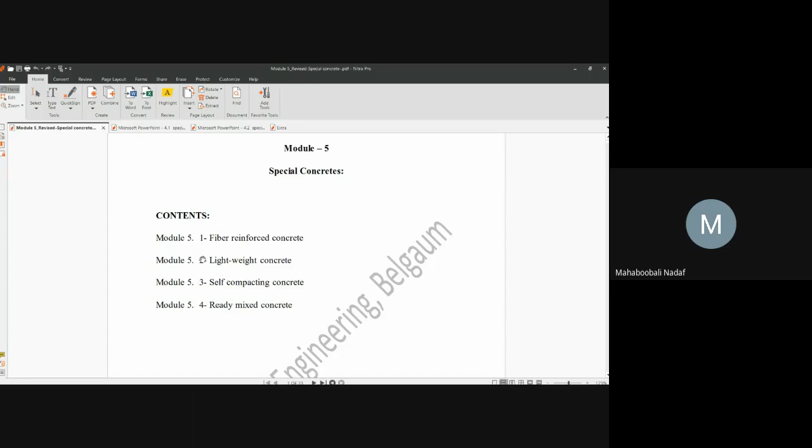What is your expectation from this module? Amrit, Bharta, respond, reply - that is very important in the online class. Okay, whether my voice is clear or not, tell me. Yes sir, very clear. How much clear - 90%, 50%, 80%? 99%, okay very good. And what about the screen?

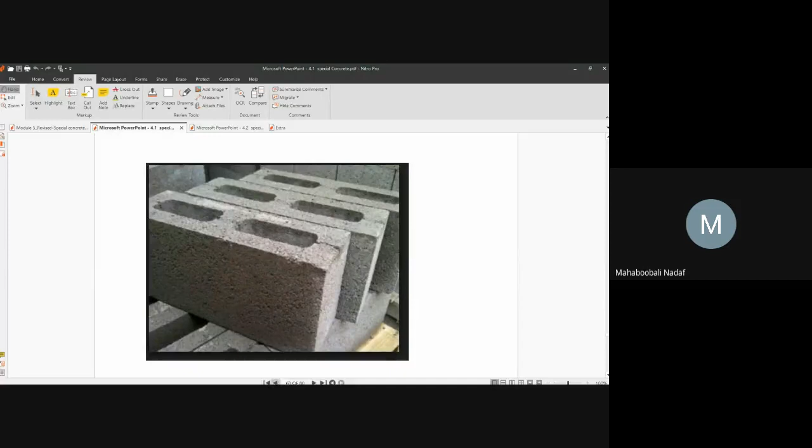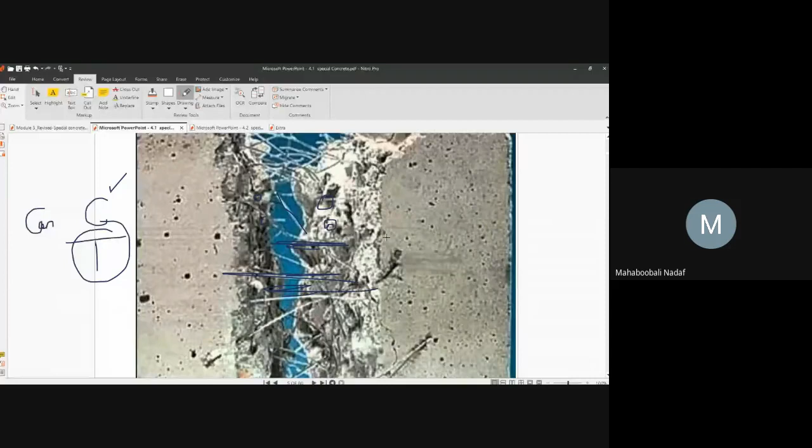Weak. Okay, now all the fibers, let's say all the fibers, steel, carbon, glass, everything - whether these are good in tension also? These fibers are such a way that they have some strong tensile property. That is why under tension they are not going to break or fail. So they are holding the concrete mass together. The total concrete strength under tension, under compression also increased. Both compression and tension, the strength is going to increase. Is that okay? How are these fibers arranged?

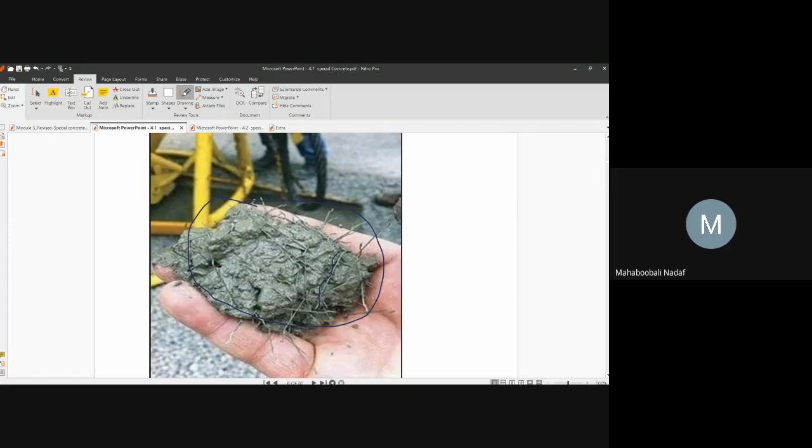Can you see this picture? The fresh concrete which has steel fibers. Do you agree with this point? Yes, sir. Very good. Okay, this is the application part.

Using steel fiber or any fiber, what you can do is you can line canals, line tunnels. That means this surface - you can plaster this surface using fiber reinforced concrete. Why? With normal concrete, if you apply it, there are chances of falling - the plaster itself will fall. But due to fibers, they are going to stick to the surface. So that is why you will have better plaster.

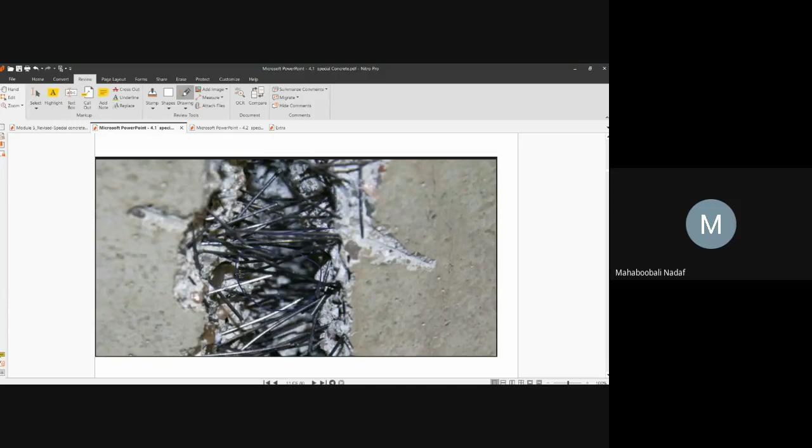This is a block which has a resistance of so much of strength. These are all called fibers. Can you see the enlarged picture of that fiber cut portion? How the steel fibers are embedded, how the steel fibers are ended. So here that fiber reinforced concrete is casted like this.

What are these fibers? Whether these are steel fibers or which fibers? Glass fiber, very good. These are called glass fibers, which have very high temperature resistance. These are steel fibers, these are called hooks.

Why are these hooks provided? For better interlocking. Now see here, this is called length. This total is called length, and its cross section will have a diameter. So this diameter of the steel fiber and its length, L by D, is called aspect ratio.

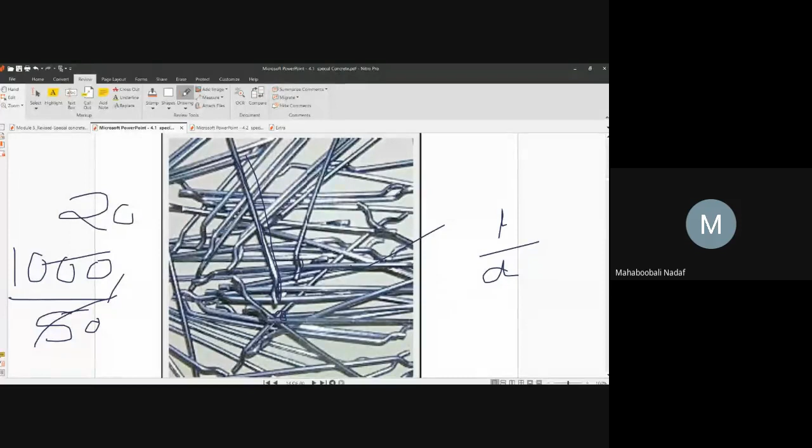Okay, these are called steel fibers.

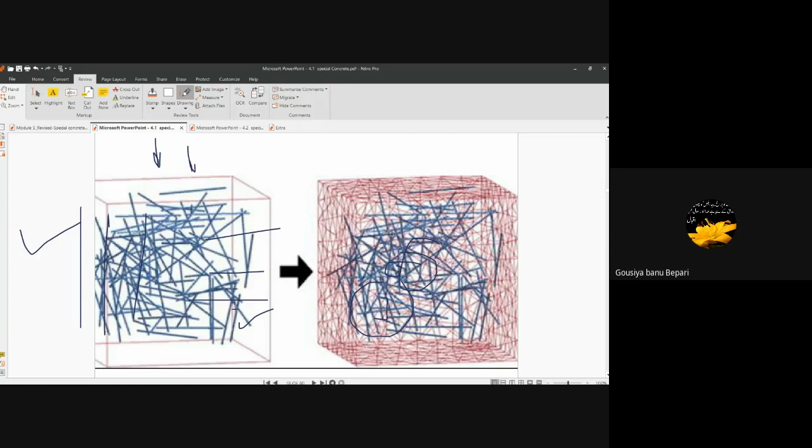If you want more strength, horizontally, sir.

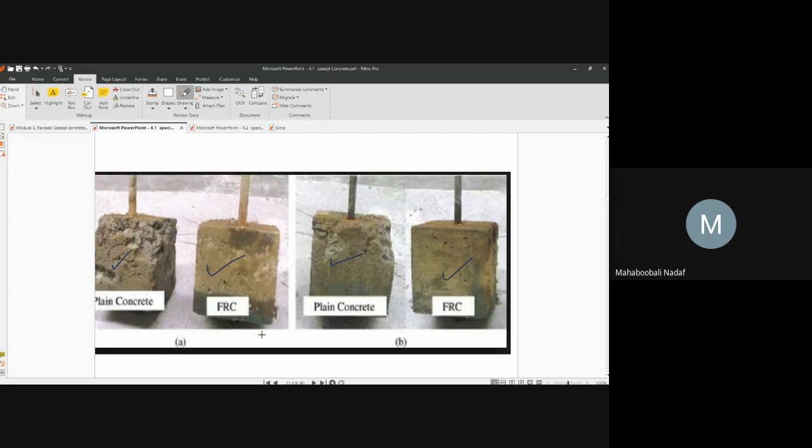Now after exposing to severe environmental conditions, which has corroded and which is not corroded? You tell me.

Corroded means damaged in this case. Plain concrete is damaged. Fiber reinforced concrete is not damaged, this is intact. That means fiber reinforced concrete has better strength in almost all cases.

Better strength. Where can fiber reinforced concrete be used? They can be used in concrete roads, yes or no? Yes, sir.

Normal plain concrete, due to extreme temperature, cracks may come on the surface. But when you put fiber concrete, fibers will act as crack arrestors, so that cracks are not going to come.

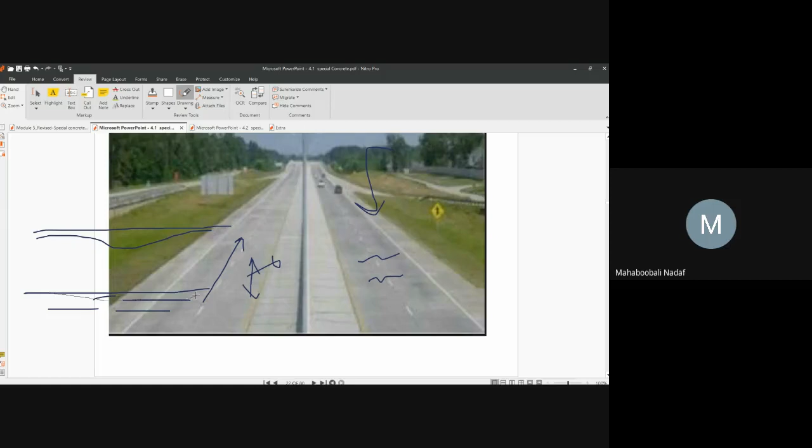That is the first point. Second point, after a long time, normal concrete may deflect like this, but in FRC concrete, due to the presence of these fibers, the concrete will not bend. It will be having sufficient strength, that is the second thing.

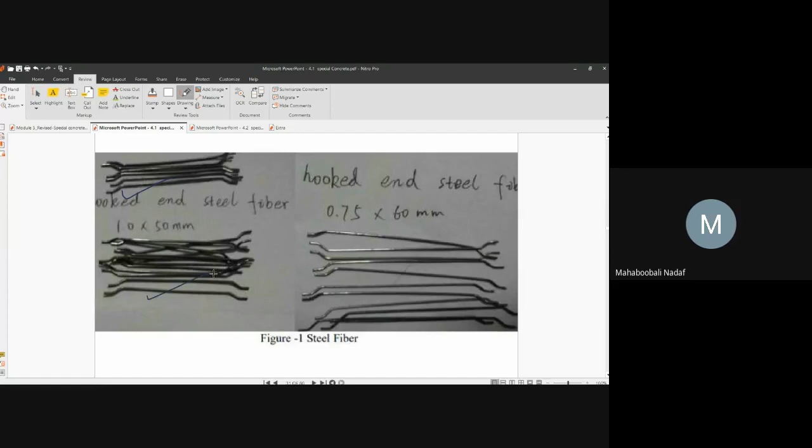Now, what are the different materials? Can you see here? This is that steel fiber, steel fiber. These have hooks, these also can have hooks.

Now these are different types of fibers, not steel fiber. There are many types of fibers: steel, glass, carbon, woven, nylon, polypropylene.

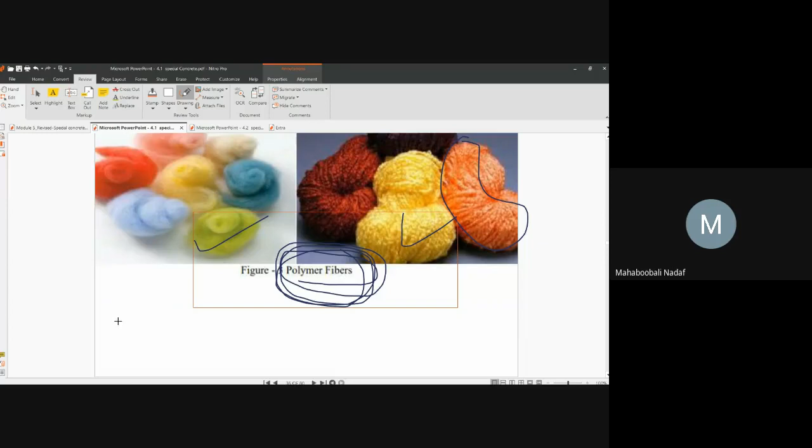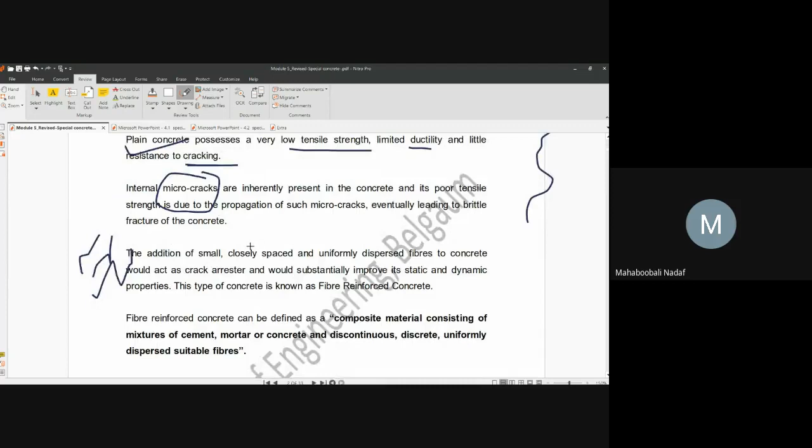Now, we'll go through this one. Fiber reinforced concrete - normal concrete has very low tensile strength, ductility is less, and it is going to crack. These micro cracks under small load will make bigger cracks. That is going to fail the total thing. But when you add fibers, cracks are going to be arrested and strength is going to be increased. So what is fiber reinforced concrete?

It is a composite material. Composite means more than 2 to 3 types of materials are used - consisting of cement, mortar, that is nothing but concrete, and in that there are fibers. How are the fibers there? They may be uniformly distributed or randomly distributed. One thing - they may be continuous throughout the concrete, or they may be discrete. ಅರ್ಥ ಆಗ್ತಾ ಇದೆಯಾ? ಕಂಟಿನ್ಯೂಸ್ ಅಂದ್ರೆ ಫುಲ್ ಲೆಂತ್, ಡಿಸ್ಕ್ರೀಟ್ ಅಂದ್ರೆ ಸ್ಮಾಲ್ ಪ್ಲೇಸಸ್.

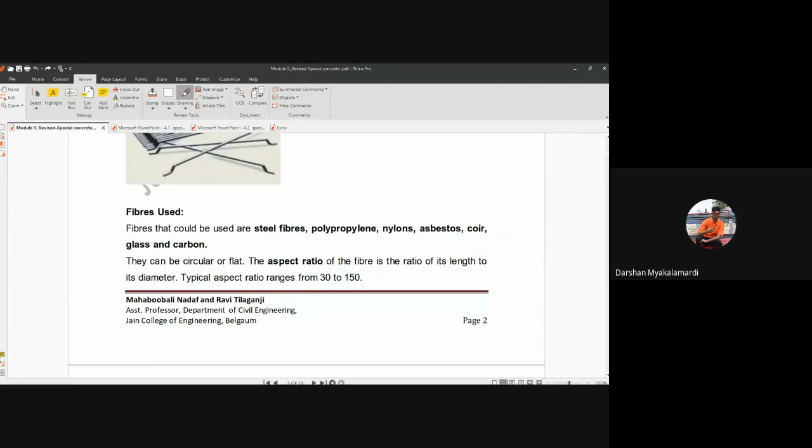Okay, see here, what are the different materials used? Steel, polypropylene, nylon, asbestos, coir, glass - everything is used. What is the aspect ratio generally we are using? 30 to 150. What is the aspect ratio? L by D. Very good - length of the fiber divided by diameter of the fiber.

Okay, so like that. Generally, maximum time we use the steel fiber - commonly available, cheap also, very good strength also. So generally we go for steel fiber. Its diameter is like this, length may be anything depending upon the requirement. It will give flexure, impact, fatigue strength.

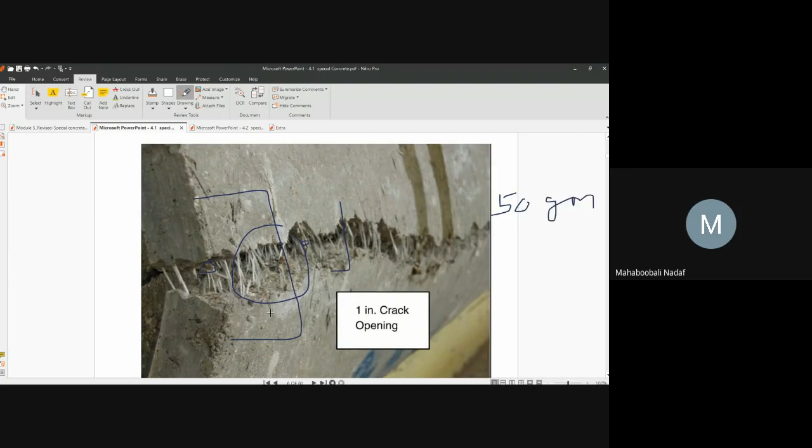Okay, next is relative fiber matrix. What is this? This is one concrete. What does fiber mean? Suppose total fibers used are 50 grams. Okay, total fibers in that concrete used is 50 grams fiber. Okay na. What do you mean by matrix? You have studied this in second module. What do you mean by matrix? Give me an idea.

Matrix is nothing but cement paste, baba. Do you remember? Matrix is nothing but cement paste. The remaining thing, whatever is called as matrix. Now suppose that matrix is 500. Let us say it is 500 grams. Is that okay? Yes, sir. Logically, I am giving the example. Try to understand. Now fiber is 50, matrix is 500 grams. Now, fiber by matrix, what is that called as? It is called as a fiber matrix ratio.

Okay na? What does stiffness mean? How strong it is. इसका भी क्या है? ये भी strong है, मगर ये कितना strong है? मतलब ये same तो नहीं रहेगा ना? This will not be the same. So how far strong it is compared to matrix? That is very, very important. Now tell me, I am going to give one example. Fiber is very, very strong, but concrete is very, very weak. Whether that is a good combination?

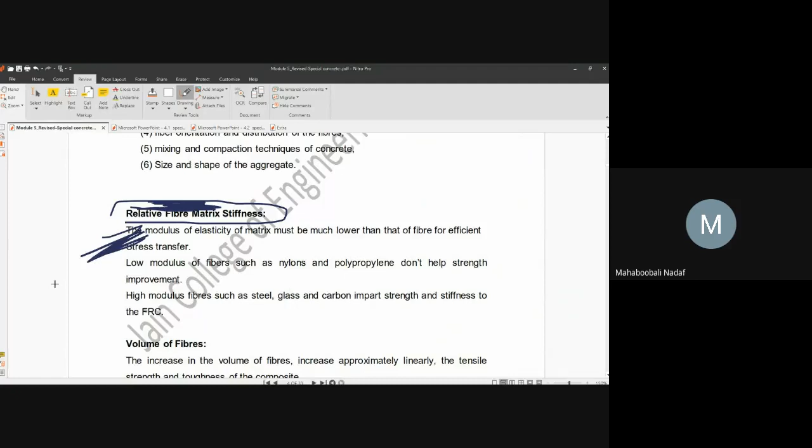जो भी हम लोग कंक्रीट प्रिपेयर करते हैं, कंक्रीट को मीडियम स्ट्रांग रहना है, बट फाइबर्स should be just stronger than that concrete, then that will give a very good combination. So this concept is called as what? Bharata, what is that concept called that we have just now studied? Relative fiber matrix stiffness. Very good. Gausia, have you understood? Yes, sir. Okay, please give response.

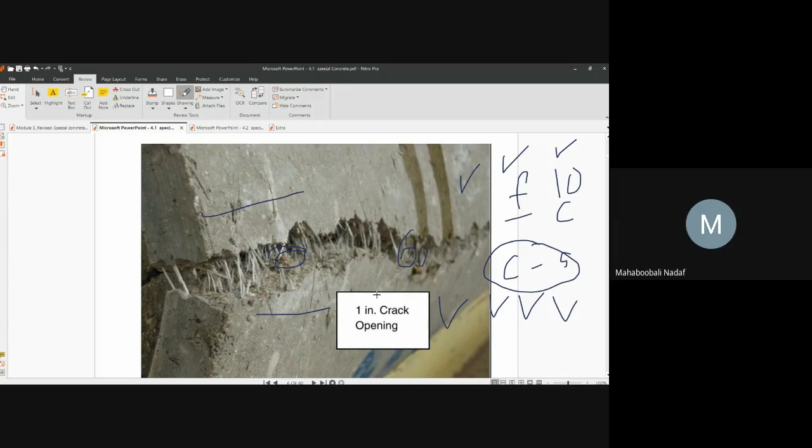Now you tell me how this factor is affecting the FRC, fiber reinforced concrete. Now you tell me, if you increase fibers in this concrete, whether strength is going to increase? Simple logic. If instead of 50 grams you put 60 grams, will strength increase? No, sir, it will increase, guaranteed. Don't go by my voice, okay? I will be tricking you people. As the fiber content is increased, obviously strength is going to increase, but only up to a certain extent.

That is one factor, okay? Next factor is aspect ratio, L by D, which we have studied. So standard, if that aspect ratio is between 30 to 150, fiber reinforced concrete is very good. If it is less than that, not good. If it is more than that, not good. If it is less than that means very short fiber, like 15, 10. If it is more than 150 means very long fibers. To have better bonding as well as better strength, the range is what?

The range of aspect ratio is 30 to 1, 30 to 150. So we generally use 75 as the standard one.

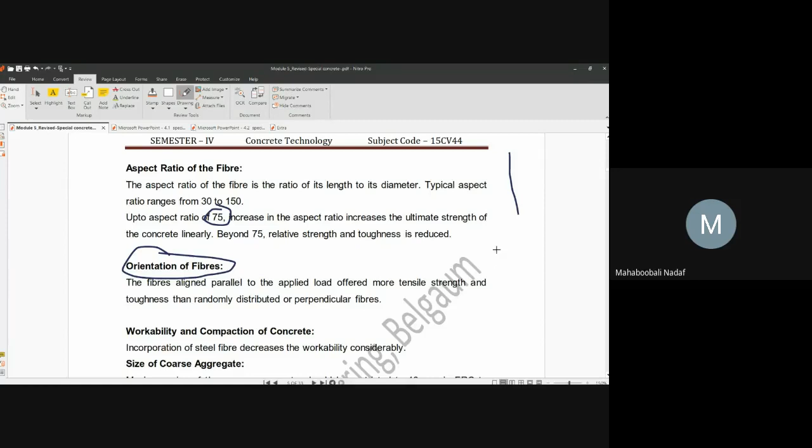Orientation of fibers: when is the load taken more before failure, in parallel, perpendicular, or random? Parallel, sir. Very good, parallel to the direction of load application. But that depends upon the condition - this is good in load carrying, but this will be good in crack arresting.

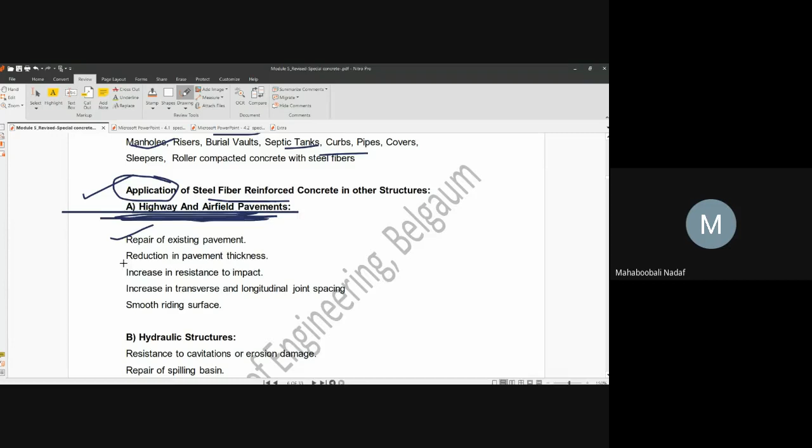Normal concrete requires 200 mm thickness. If you use FRC, 100 mm is enough - that means for the same strength the concrete quantity is reduced. Why? Fibers will take more load. There's increase in resistance to impact, it's good at joints, gives a smooth riding surface. In hydraulic structures, erosion control is very important.

Can you name any hydraulic structure, Nandita? Amrit Mane, can you name any hydraulic structure? Akash? Dam gates. Very good.

Dam gate, canals, sewer lines, pipelines - all these are called hydraulic structures. Their erosion is a big problem, so to control that we are using FRC.

Now, what is this fiber shotcrete? Can you tell me? Do you know what shotcrete means? What is this?

Concrete is different, shotcrete is different. In normal concrete you can use fiber reinforced concrete, and in shotcrete also you can use fiber reinforced concrete. Now, what is shotcrete?

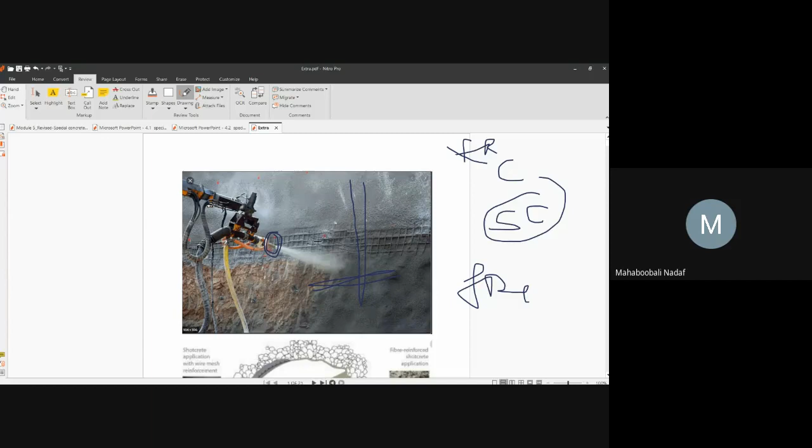You tell me first - shotcrete is concrete that is sprayed on the vertical surface, horizontal surface, or inclined surface with extreme velocity. That concrete is sprayed so that it sticks on the surface. This spraying of concrete is called shotcreting.

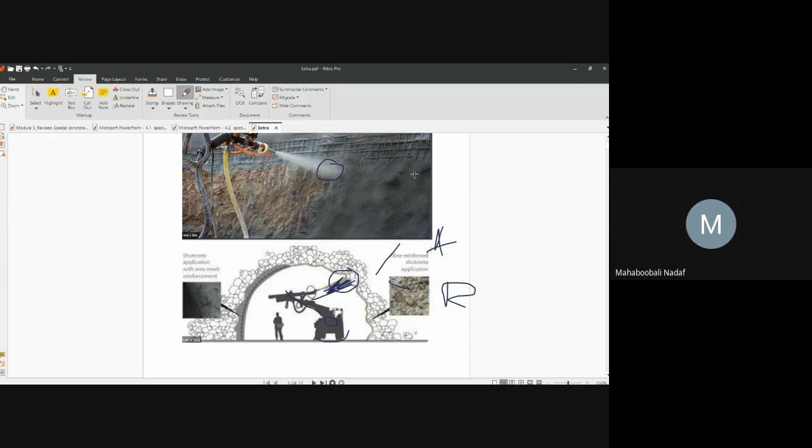Now tell me, here's a tricky question. In shotcrete, do you use an accelerator or a retarder? You tell me which admixture you are going to use here - whether accelerator or retarder.

Accelerator. Very good, accelerator is the correct answer. And why? Fast setting time - quick setting. Quick setting time, quick setting time.

Have you seen the shotcreting done on surfaces, sometimes when you are going in a bus or train next to a hillside road? Next time whenever you go, observe the roadside work. This is called shotcreting. One application is rock stabilization, meaning the stones should not come loose and fall. To control that, they make the structure and shotcrete that surface.

Second is tunnels and dams. We have seen bridges made with this too, everywhere it is used. Is that okay? FRC. Have you understood FRC? Yes sir, very good.

Please give response. Next special concrete is lightweight concrete. Normal concrete is different, lightweight concrete is different, heavyweight concrete is different. Is it heavy weight or high weight they call it? Heavy weight. Okay.

So lightweight has very less density. Normal means normal. Heavyweight means which has got high strong aggregates. These are called heavyweight or high density. Now, normal concrete density is about 2200 to 2600 kg per meter cube. This is called unit weight or density.

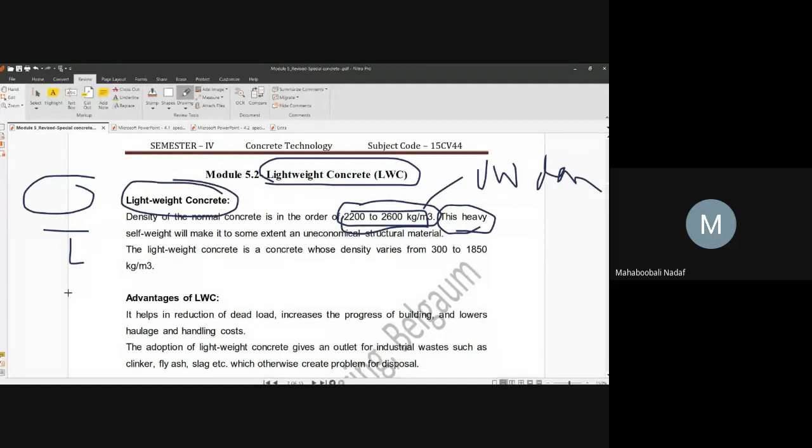Now this is not required for some concrete, where you want to do a partition wall, when you want a barrication, when you want additional rooms. There you don't want normal concrete or heavyweight concrete, you want lightweight concrete. Meaning your concrete should be very light. So that density is generally 300 to 1850 kg per cubic meter.

Now you tell me the advantages. Whether it is going to reduce the dead load? Yes. Speed of construction is increased? Yes. Transportation and handling cost are reduced? Yes. So in lightweight concrete, you can use waste material such as fly ash, slag, all these things can be used. Now how to make the lightweight concrete?

How? If whatever aggregates we are using are lightweight, then the concrete will become lightweight. Yes or no?

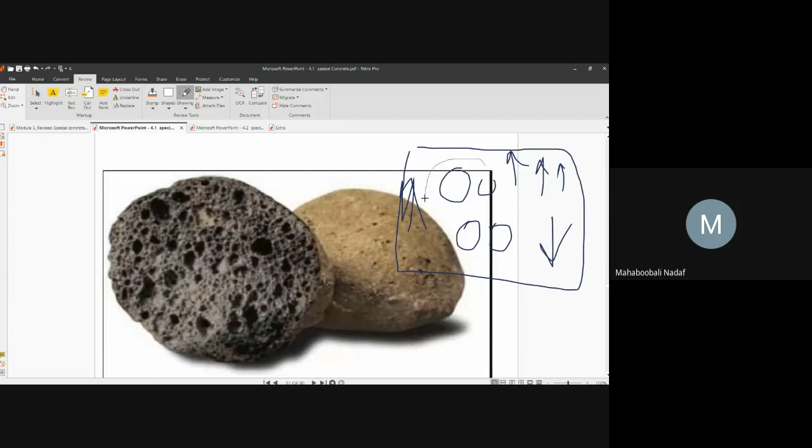Segregation. Very good. So the major problem with this aggregate is segregation and water absorption. Segregation and water absorption, okay everyone?

Okay, now here we'll just go through that one. First is by using aggregates which are light.

In another case, you can use gas. While preparing the concrete, you can use gas or air bubbles inside it. So if air is entrapped inside the concrete, whether it is going to become lightweight or heavyweight?

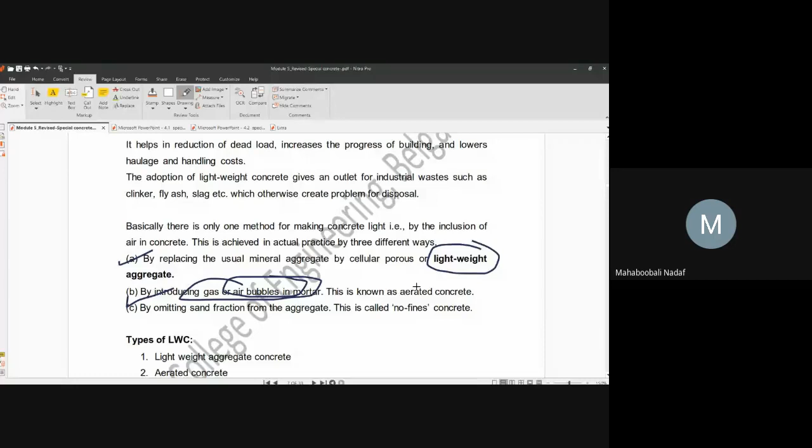Lightweight. So if gas or air is inside, then that concrete is called aerated concrete. You are putting intentionally air or gas so that it gets entrapped in the fresh concrete, and that makes the concrete weight lighter.

Third is, if you reduce the sand content in the given mortar or given concrete, then we call it dash.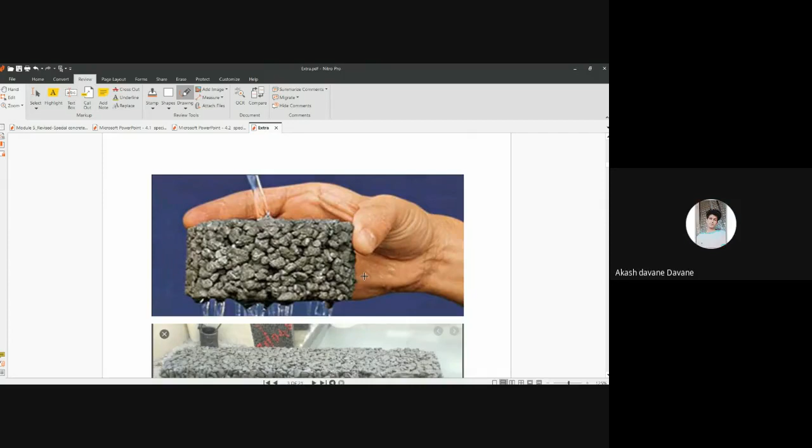Aggregate, water, and cement, sir. Very good. Aggregate, water, and cement only these things are used.

Okay, now you tell me, permeability of this is more or less? More, sir. Very good.

Very good. Now you tell me, if you are removing something here, that is sand. Something is being removed. What is happening to the weight? Reduced or increased? Reduced, sir.

Reduce, very good. So it will become what weight? Lightweight or heavyweight? Lightweight, sir. So by removing the sand fraction,

by removing the fine powder from the concrete, you can make the concrete lightweight. Is that okay?

What are these concrete made up of? What is this concrete? Lightweight concrete.

Okay, in lightweight, whether it is lightweight aggregate, aerated, or no fines. See, lightweight means three things are there: one is aggregate lightweight concrete, aerated concrete or gas concrete or foam concrete, both are the same, and the last one is no fines.

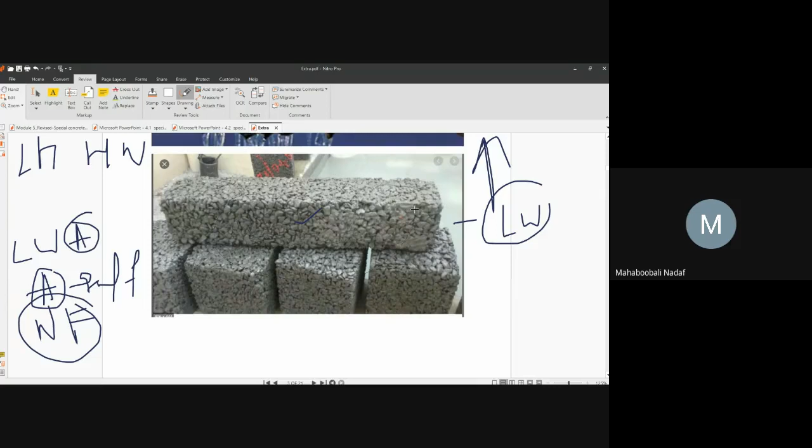No fines, sir. It's called no fine concrete. This is a bigger picture. This is called the bigger picture of that no fine concrete. Okay? So like that.

Lightweight, aerated, no fines. First is aggregates are light. Aggregate itself is light. So what are the names of these light aggregates? These are the names of that lightweight aggregate.

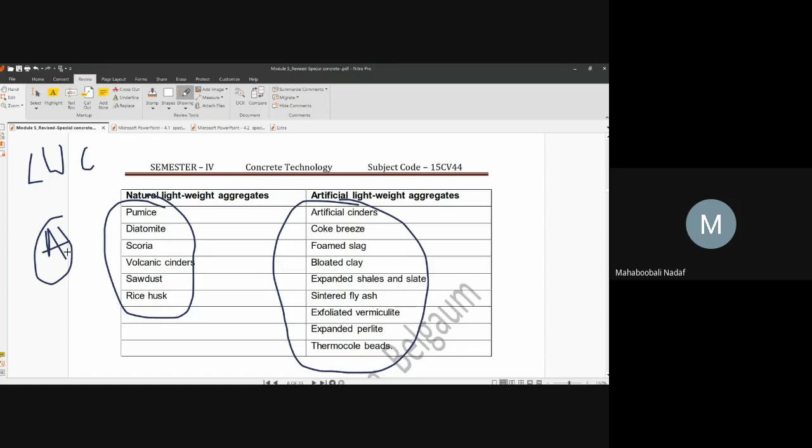Okay, now here tell me, lightweight aggregate concrete, what is the density?

300 kg per meter cube, by using vermiculite aggregate. By using slag, what is that?

1900, sir. 1900. Now you tell me, is this natural lightweight or artificial? This one, perlite or vermiculite?

Perlite or vermiculite - is it natural or artificial?

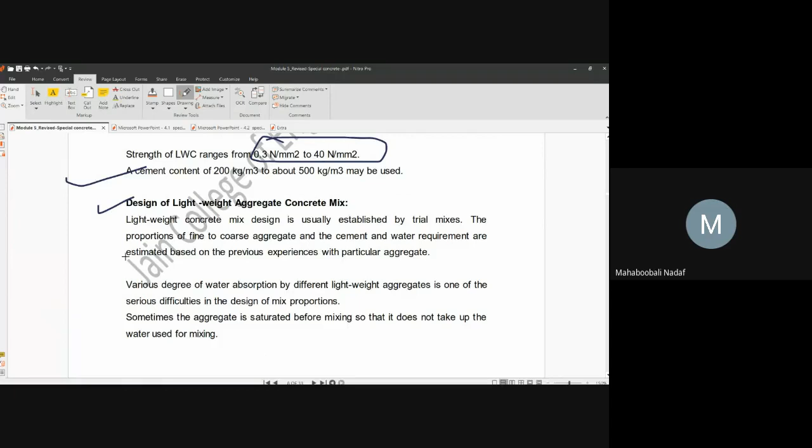How to design? This question will come up, very important. What are the basic design things used here? Lightweight concrete always depends upon how much coarse aggregate, cement and water are there. This is, I think, the next step I am going to come to. Okay, what is this?

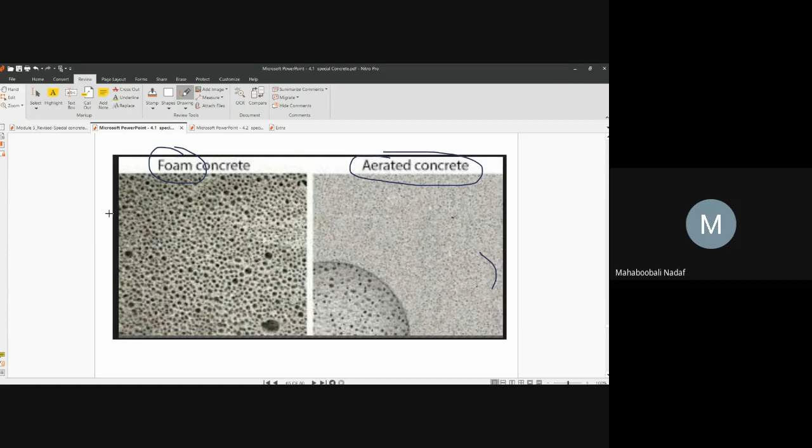If lot of foam is there, what is that? Tell me what foam means. Foam means one type of chemical substance which has high volume, spreading volume. So if that foam is inside the concrete, volume is increased, lot of air bubbles will come.

So if lot of air bubbles are present, then that concrete weight is always going to reduce. Can you see the picture of aerated concrete here in this diagram of a section? Can you see, everyone? Yes sir. So please give everyone response, whether you are there or not.

Okay, now this is what aerated concrete means - air bubbles have been produced during the manufacturing and those are trapped there only. The air bubbles don't escape - air bubbles are always present inside the concrete even in the hard state.

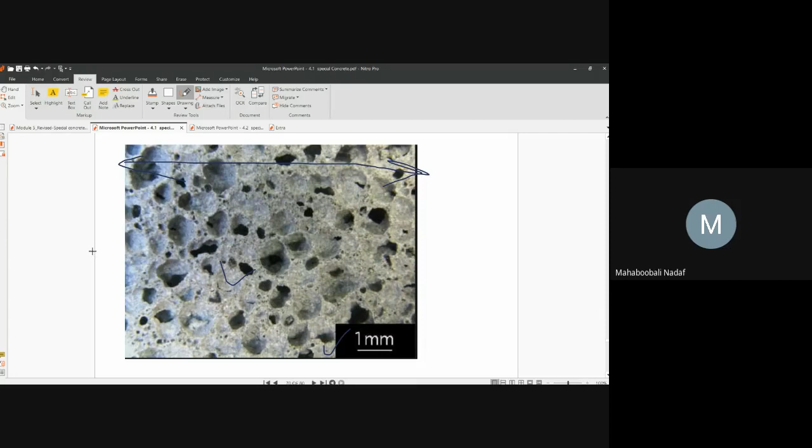Aerated - now how is this air produced? How is that formation of air introduced here? How is that foam introduced? Okay, by using aluminum powder. See, aluminum powder, when you put it in fresh concrete - what are the compounds which are already present? One is CSH gel, another is what?

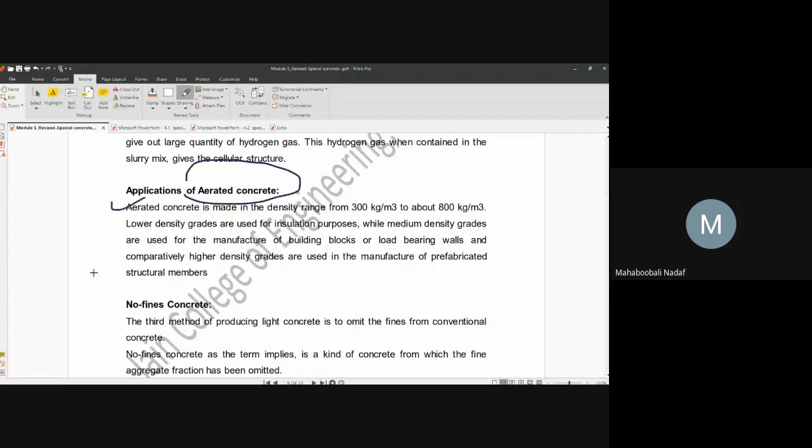Lot of air bubbles - that is how you are going to make those air bubbles. Applications of aerated concrete: wherever you want to reduce the dead load, there you are going to use that one. No-fines concrete means what? Sand fraction you are not using - sand is not there, so directly you are using coarse aggregate and all. So that is what we call no-fines concrete.

What is the typical mix here - aggregate to cement ratio, this is the standard. Okay, normally 20 mm passing, 10 mm retaining - only these aggregates are used in making this lightweight concrete.

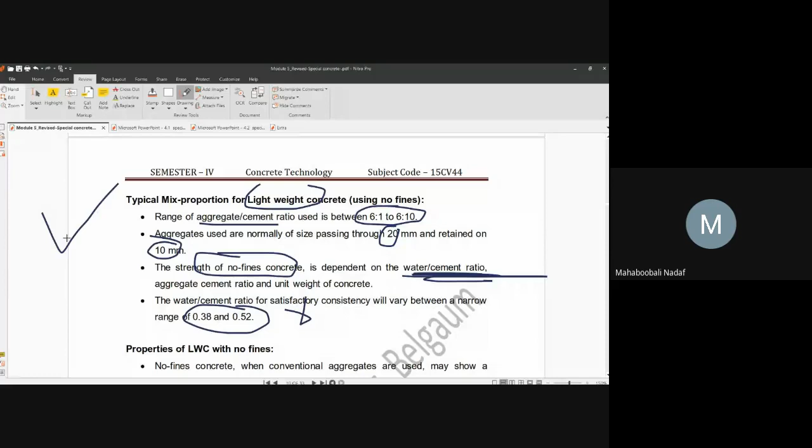Strength of this no-fines concrete always depends upon water cement ratio - that you already know. Standard water cement ratio is 0.38 to 0.52. This is the typical mix proportion, and it has been asked many times in the examination.

So these are some properties: density of no-fines concrete, strength of no-fines concrete - shrinkage is not at all there in this no-fines concrete. Coefficient of thermal expansion, thermal conductivity is also very less.

Where can you use this application - for external walls where load coming is less, okay, in multi-story buildings you are going to use it for heat insulation. If lot of voids are present, then heat is not passed easily, or these voids will act as a barrier.

Okay, you people are not interested. I will simply teach and go. No problem. Those who don't want to attend can leave, no issues. Anyhow, you are not going to interact or participate. You can watch the recorded videos. Why are you keeping here?

Okay, so applications of lightweight concrete: multi-story buildings, whenever you want rough texture, and whenever sand is not available, then you can go for lightweight concrete. Is that okay for everyone? Yes, sir, very good.

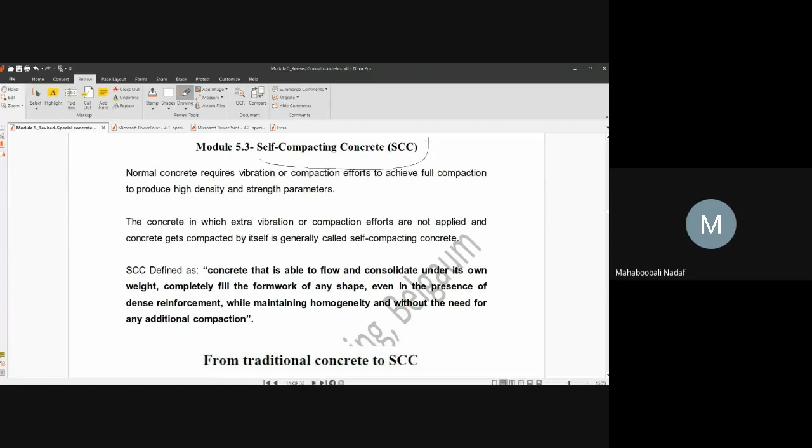Next concept: self-compacting concrete. Normal concrete always requires vibration to compact it. Okay, so now if you don't want to vibrate but you still want to fill everything completely, then this concept is used. What is this? Self-compacting concrete.

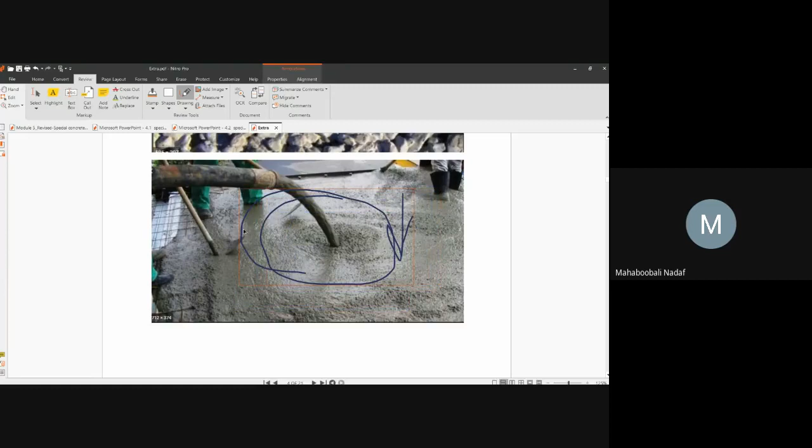Here, the concrete is able to get itself compacted by its own weight. Extra effort is not required. By its own self weight, its own water content, its own consistency, it fills all the places, all the gaps inside reinforcement, inside all the formwork, by virtue of its own self weight. Then we call it self-compacted concrete.

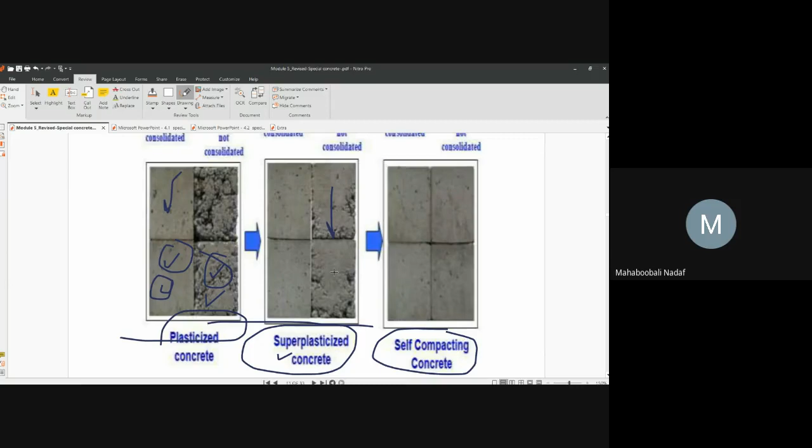The same is true for super plasticizer, but the compaction effort required is less. That means if you reduce the vibration a bit, it still gets compacted. This one is fully compacted, this one is not fully compacted. Okay, this is super plasticizer.

Now see here, self-compacting concrete: whether you compact it or not using vibrators, the structure of that concrete is the same before compaction and after compaction. That means you don't require vibrators here at all. Is that okay? Yes sir.

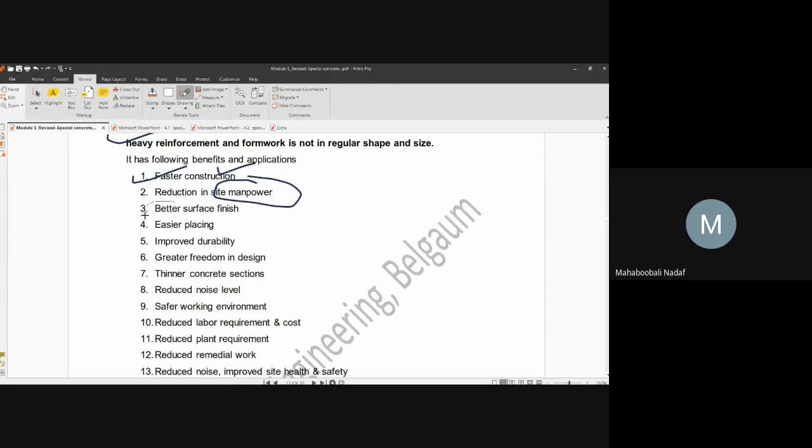So where can you use self-compacting concrete? In fast construction - using a vibrator costs time and money, so you have to wait. But using SCC, construction is fast, labor is reduced, surface finish is good, placement of concrete is easy, durability improves, good design can be prepared, thin sections can be prepared, noise is controlled because vibrators aren't used, and it's a safer working environment since vibrators, electric wires, current, and cables are not required. That is why it's safe - labor and cost are reduced.

Plant requirement is also reduced. Reduced remedial work means no cracks or repairs are going to come. So many things are called applications of self-compacting concrete. Is that okay for everyone?

Yes sir. Sir, workability is also more. Yes, workability is also more - I will come to that point, a very important point. Detailed tests are there for that. Now I will explain the general materials in detail, no issues.

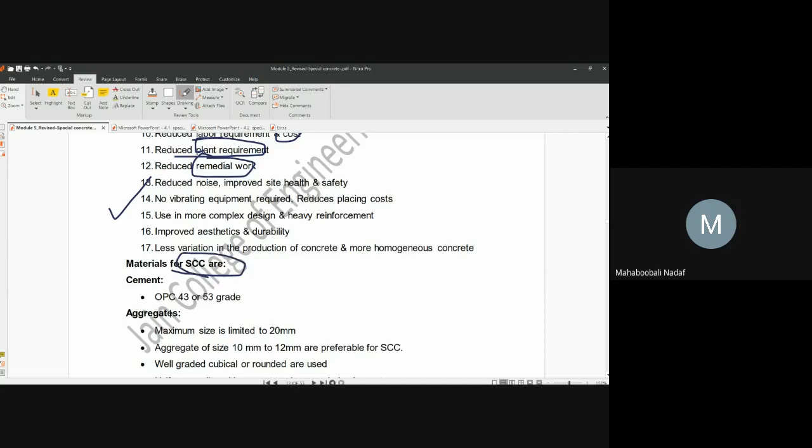Now see here, what are the materials used? Normal cement, that is okay. Aggregates - can you see the aggregate here? What is the maximum size? 20 mm. Here maximum size is 20 mm, you cannot use bigger than this, but generally you use only 10 mm. You are not going to use 20 mm.

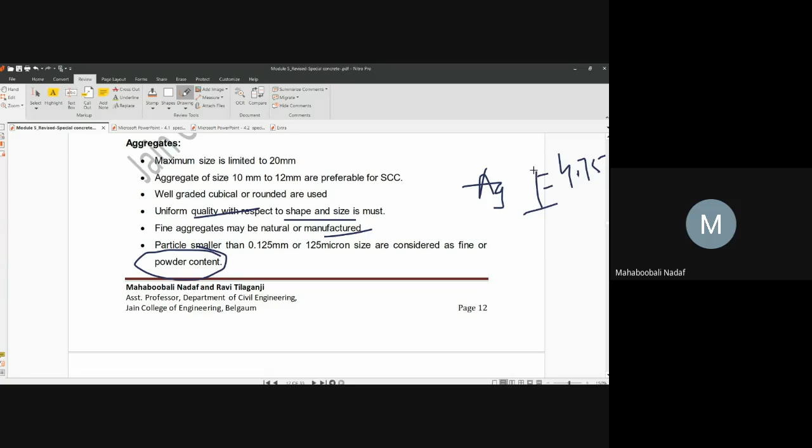Bigger than 4.75mm, particles are called coarse aggregate. Now particles smaller than 0.125mm or 125 micron are called powder.

This powder content is present in higher amount in self-compacting concrete. That is the most important difference from other concretes - the fine powder content is more compared to other things.

Mixing is prepared similarly to other things. Generally what type of admixtures are used? Super plasticizer, VMA, air entraining - all these are used. What are the mineral admixtures? GGBS, fly ash, stone powder can also be used.

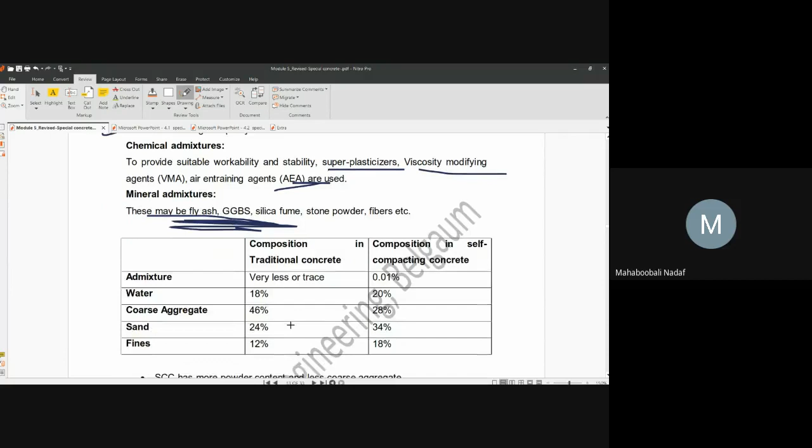Now tell me, what is the normal mix of normal concrete? What is the self-compacting concrete mix? Very important from exam point of view. You should be in a position to write down this comparison between normal and self-compacting.

In normal concrete admixtures may be used but very less, but in self-compacting they have to be used up to 1%. So remember this 1% value, we use this in mix design example. How much admixture is taken generally in the mix design?

Water reduction will be less than 50%, but admixture quantity is 1% of cement, 2% of cement. Now water content is generally 18%, here it's 20%, a little bit more. Coarse aggregate - that's the difference maker here. Coarse aggregates are 46% in normal concrete, but in self-compacting concrete, are they reduced or increased?

Reduced - coarse aggregate content is reduced. Compared to other things, sand content is increased. Fine content or fines/powder - in normal concrete it's 12%, in self-compacting concrete it is increased. So many things are different in the mix.

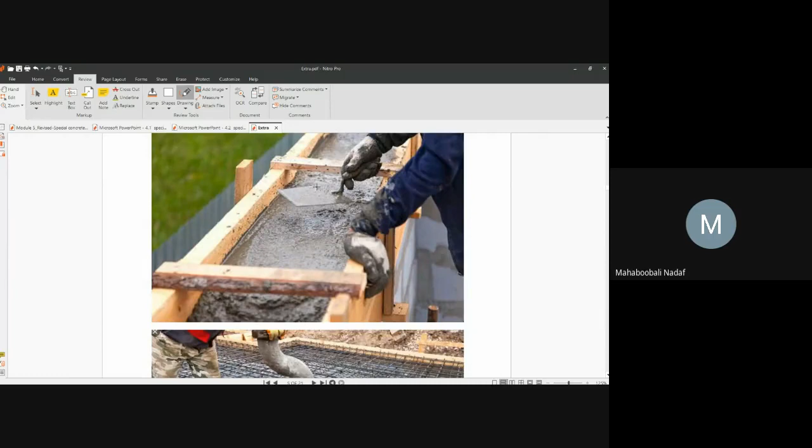Yes or no? Very important point. Filling ability means by placing concrete at one place, by pouring that concrete in one place, it should go to all the places and fill everything with concrete. So that ability we call filling ability, which completely fills all the places.

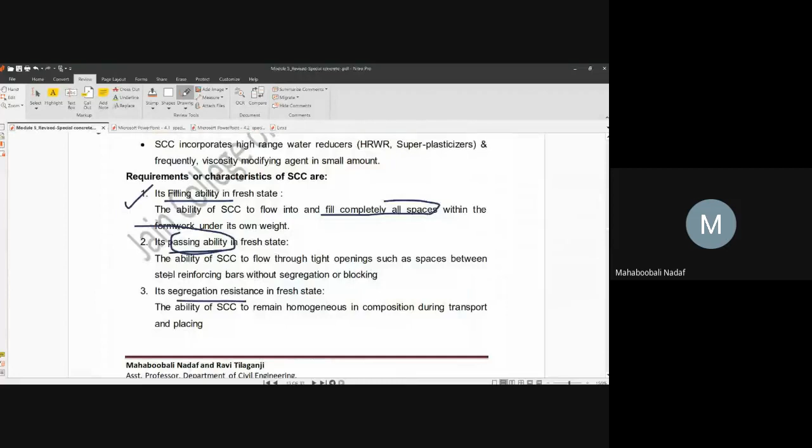Segregation resistance means - whenever it is filling, whenever it is passing, segregation should not take place. So these are the three basic requirements.

Three basic requirements. What is the standard mix proportion?

Water to powder ratio is 0.8 to 1. Total powder content is 240 liters per cubic meter, or ranges 400 to 600.

Sand content should be more than 38%. Coarse aggregate generally should be less than 50%, in the range of 28 to 35%. Water cement ratio will be decided based on the strength requirement.

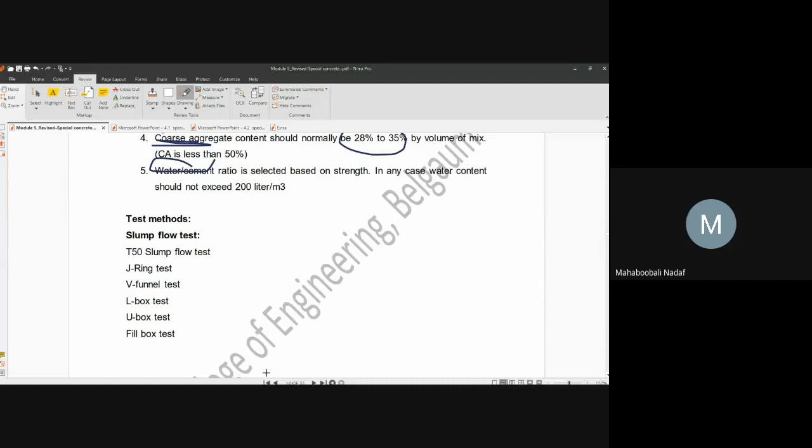Yes sir, yes sir. At least give an answer to this. I will not ask the question, I will just be asking whether it is okay or not okay, whether you have understood or not. Now onwards I will stop asking questions, just whether it is okay or not okay. Yes sir, yes, okay.

One fixed question will come in the main exam - that is nothing but tests on self-compacting concrete. What are the different tests conducted on self-compacting concrete? Very, very important. First is slump flow or T50 slump flow test.

Just see this diagram. Now I will go to the test. What is the ability here? Whether it is filling or passing, segregation resistance - all three things are there. It is filling all the places, it is passing through all the steel, and it is not at all segregating. This is called the slump flow test.

I will explain the procedure, the dimensions - other things you just go through. Main process I am going to explain now. Now you want to measure the workability.

Nehal, you asked that question about workability, right? Now that comes here. Compared to normal concrete, workability properties are very important in self-compacting concrete. At least do you agree to this point? Yes or no? Yes sir. Okay, now how to measure the workability?

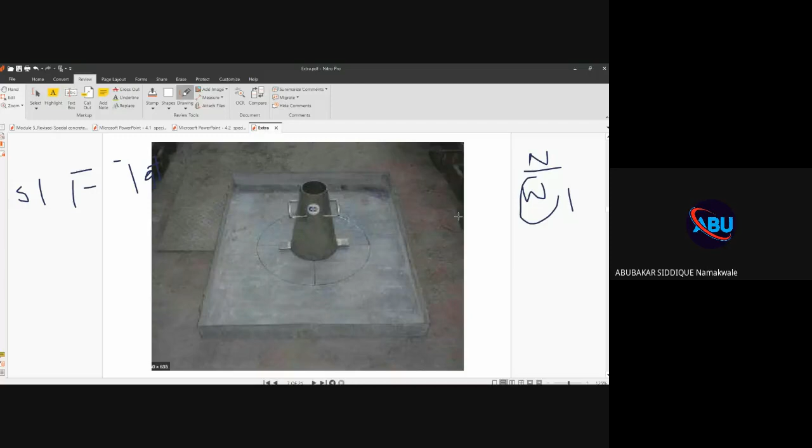Inside this you pour concrete, the height is known. If you remove it slowly, that height becomes a little lesser. So that height will become little bit lesser, that of concrete. Whatever difference you are getting, that difference is called slump. So this is used in normal concrete.

But in self-compacting concrete, slump itself is very large. Water content is very large. Whether that concrete is going to stay in position or whether it is going to spread here.

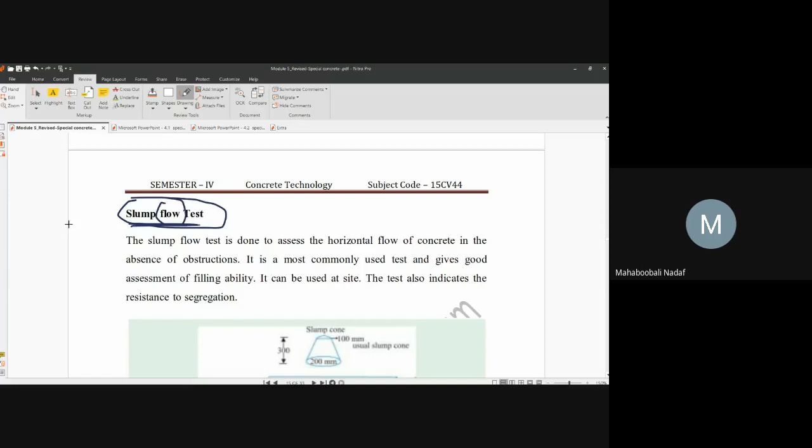See here, this is a circle of 50 centimeters diameter. And this cone's diameter here is 20 centimeter. Outside is 50, inside is 20 centimeter.

Can you see the line here, the circle? Is it visible? That is a 50 centimeter circle, 50 centimeter diameter circle.

Now exactly at the center, that cone is placed. Now next, they are putting the self-compacting concrete inside. Slowly, but you should not compact it. In normal concrete, you compact it in 4 layers giving 25 blows, but here you are not compacting.

This is a very important difference. You just need to pour concrete inside this, remove whatever extra comes out, and then slowly lift it up. Slowly, if you lift it in a vertical direction, what will happen to the inside self-compacting concrete?

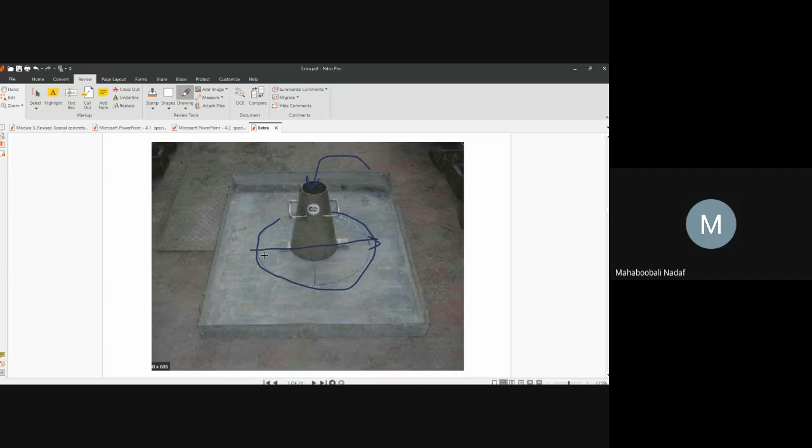Now see in this diagram, this is another diagram. What is the diameter of the outer circle here? 50. It's called 50. So inside is 20. Can you see this diagram? Another tray, another slump cone, another tray.

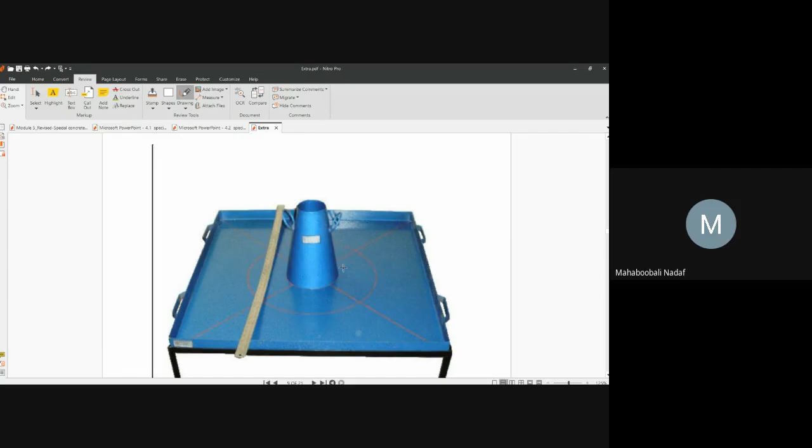Just as you remove this, the time from when that concrete is just touching this circle - how many seconds it has taken. T50 means this 50 centimeter diameter circle - just take this, how much time is needed for the concrete to reach it.

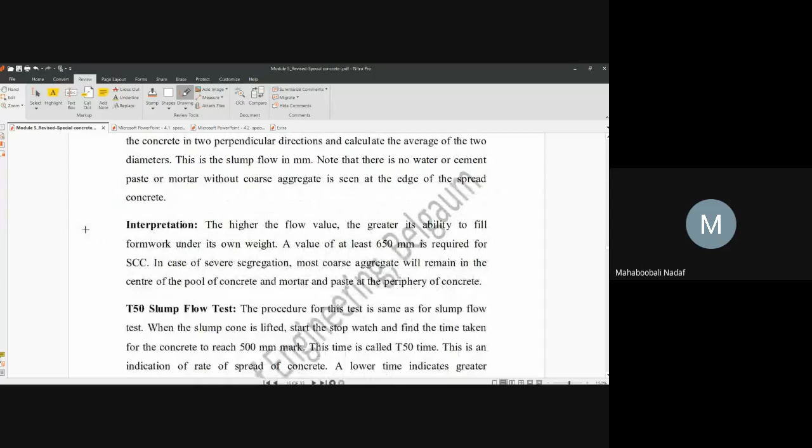Very important, compaction is not done. It is not at all compacted. More spread means more workability - simple, direct comparison. At least minimum 650 is the spread. You should expect at least 650 mm or 65 centimeters.

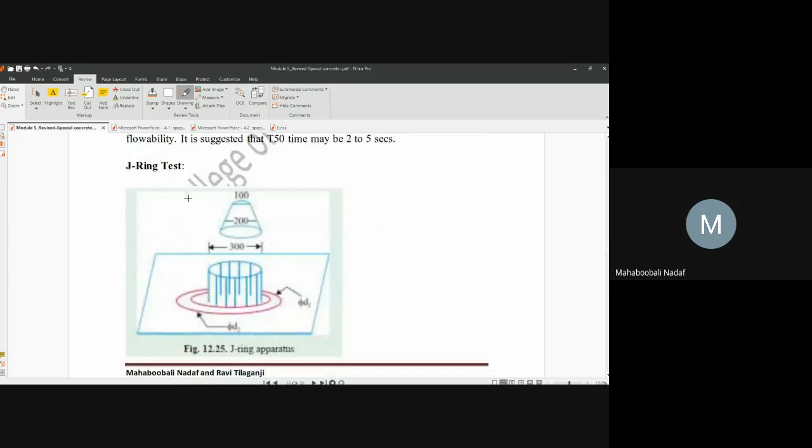What is this test? What is that test?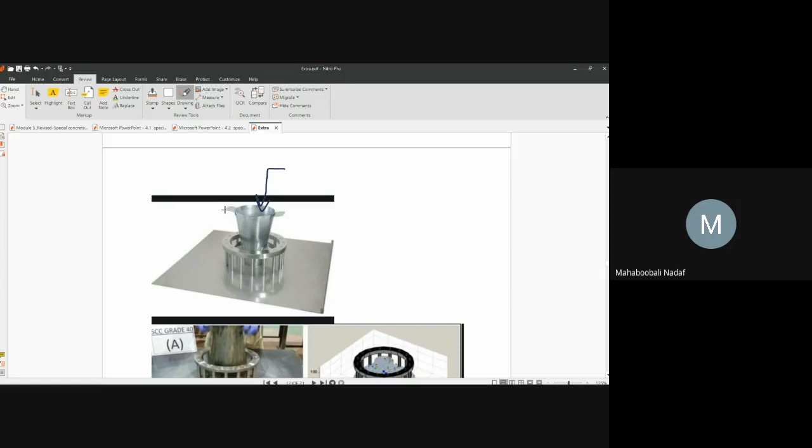Now in that slump cone, concrete is poured without any compaction. Concrete is poured, okay? Once that concrete is poured and completely filled, you are going to remove this one. Once that is removed, what will happen?

The concrete will come out. Yes or no? It will come outside.

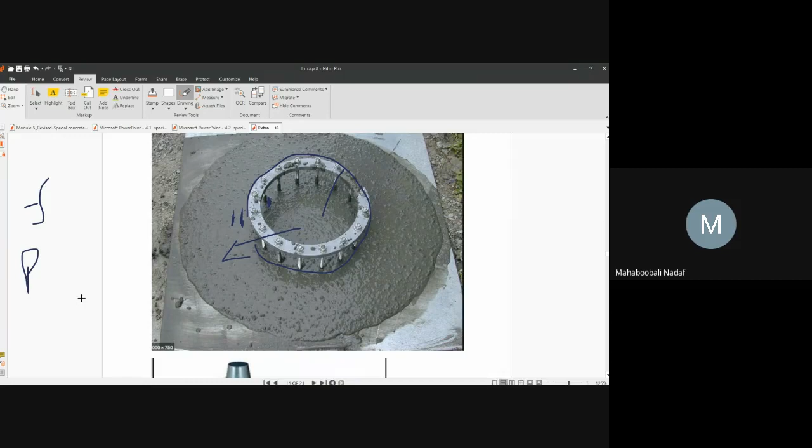Passing ability. It is called as passing ability. Okay, how easily it is passing. Okay, and what is the height inside the J-ring and outside the J-ring?

Inside height, outside height. If inside height is very much more compared to outside height, then we call it as not good passing. It's not good passing. If inside height and outside height are the same, then we can call it very good in passing. Okay, na?

Yes or no? Now, whether this diagram is very good in passing or not good in passing, compared to this diagram?

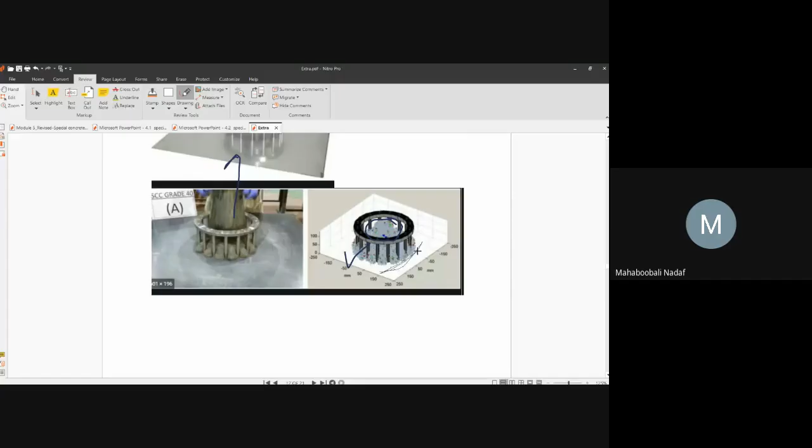Not good. It is not good in passing because outside height is very less. So this is not a good thing. The difference in height is too much. But when you see this diagram, it's a very good self-compacting concrete because the height difference is very, very less.

This is a typical J-ring. What is the diameter? What is the spacing? How many numbers are there? Everything is here, everything is here.

So here got 10 mm bars. What is the size of the bar? 10 mm bar. Okay, spacing how much? Okay, 30 mm spacing or 20 mm spacing, they are generally kept.

Okay, so like that. If the difference is very, very less, then we call it a very good concrete, very good self-compacting concrete. Now what is this test?

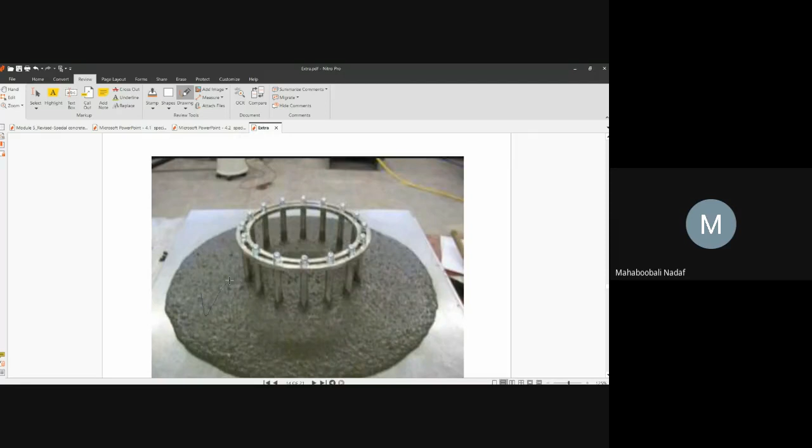Okay, now see this diagram, the actual diagram I will show. This is also a good passing concrete. Are you measuring the spread, how much, here? Yes or no?

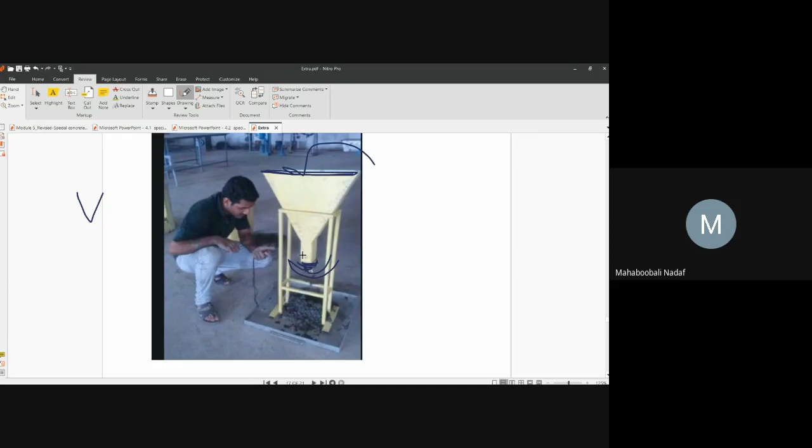Now see here, this is called the V funnel. What is happening? This is a big funnel, inside it is hollow, and at the bottom there is a lid to open and close. First you close the lid, fill the self-compacting concrete till this level.

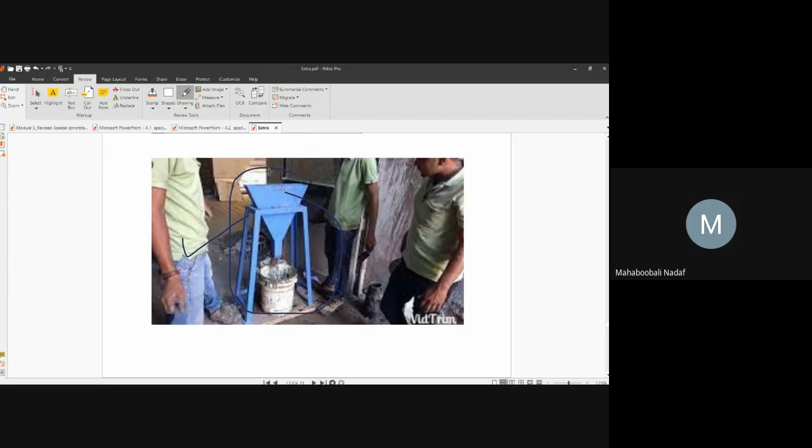This is an example, a site example of how they have prepared the V funnel test - pouring, opening the lid, and recording the time to empty. This is another example of the V funnel test.

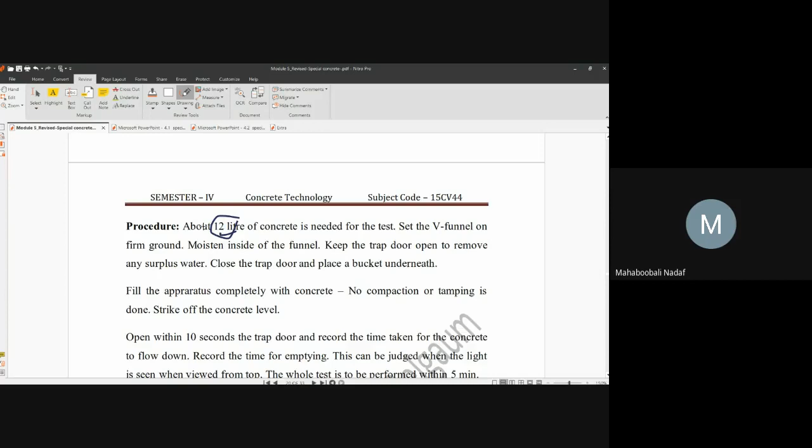Any doubts in this? You should not write all the things in the exam - only important points like the size, how much concrete, and the time. Brief steps are okay. I have written in detail what equipment you require and the procedure, take this much. If you write 12 liters, no problem, or if you don't write it, also no problem. But the main procedure is this.

So shall we stop here, or shall I continue for another 10 minutes? Hello? Hello? Tell me the answer - continue for 10 minutes or stop? Stop, sir. Sir, stop.